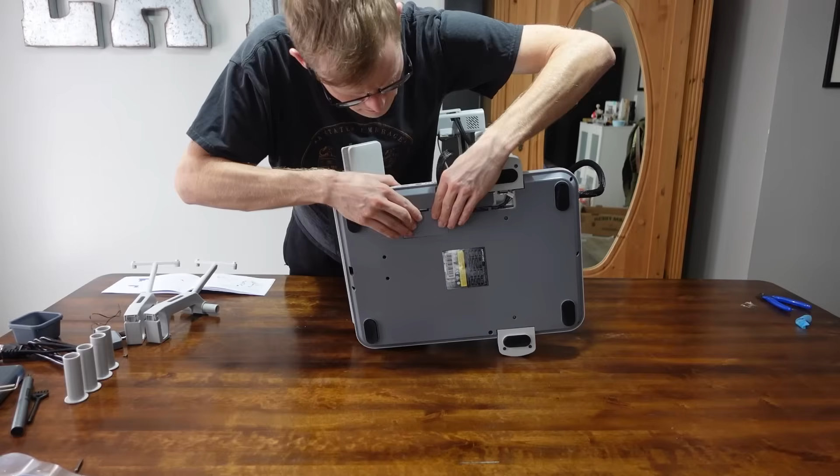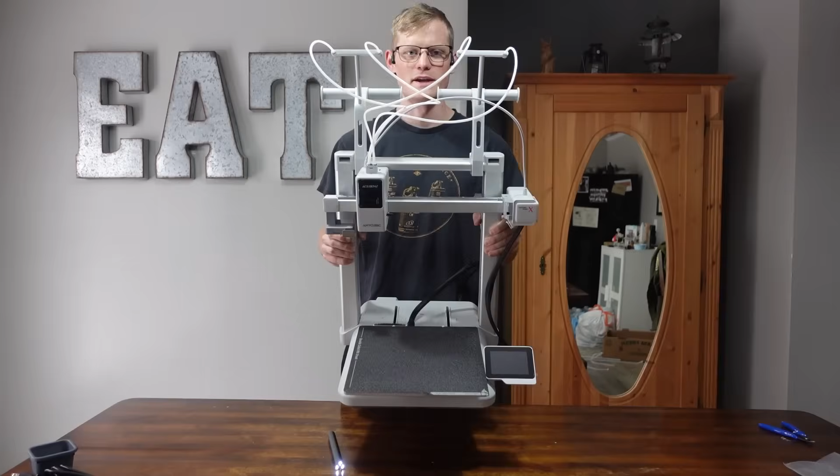Alright, so the Anycubic Kobra X is now done being assembled. It only took a few more minutes to assemble than a regular Core XY, but that's because the gantry and the bed are separate. Then again, it was only 8 bolts and just took a few extra steps. The assembly and setup was super quick.

The fact that this will hold 4 filament spools and the management system is contained right here is really nice. I am very excited to test this machine out, so I'm going to take it over to the print room and start some prints.

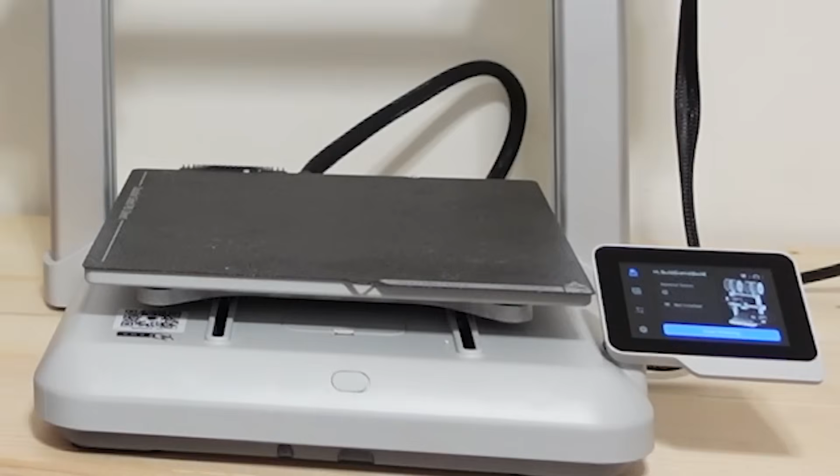Alright, first things first, I'm the realist. Second things second, printer specs. So, the first thing you will notice about this printer is that yes, it is a bed slinger, but it does have some pretty cool features. To start with, the build volume on this printer is actually larger than most Core XY printers on the market, which are only 256 millimeters cubed. This is 260 millimeters cubed. The Kobra X does not have a separate filament system, it is actually all located within the extruder itself.

But this printer isn't just multicolor, it can also do multi-material printing. So you can print PLA, TPU, PETG, PVA, and many more. Basically anything that this printer can print, it will print in a multi-material fashion.

This printer also comes with the new ACE Gen 2 extruder mechanism, which allows for variable pressure to be applied to different filaments based on their hardness. So it can compensate for the different hardnesses in materials such as PLA or TPU when you're printing them together in a multi-material print. The printer itself also has a 49-point auto-leveling system that runs before every single print.

This ensures that each print is perfect every single time. Another great thing, they have redesigned this hot end to make swapping out the nozzle so much easier. You simply just pop the lever open and the nozzle can be taken out and swapped. The printer can resume printing after power outages, and you can skip parts if there's defects detected during printing.

Also, this machine retails for $399. However, with the early bird special, this only costs $279, which is insane for everything I just said. It also has a built-in camera for print monitoring, spaghetti detection, and time lapses.

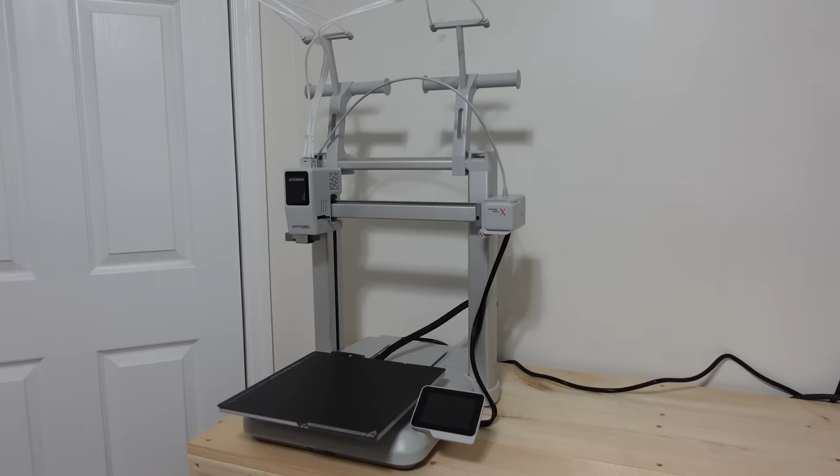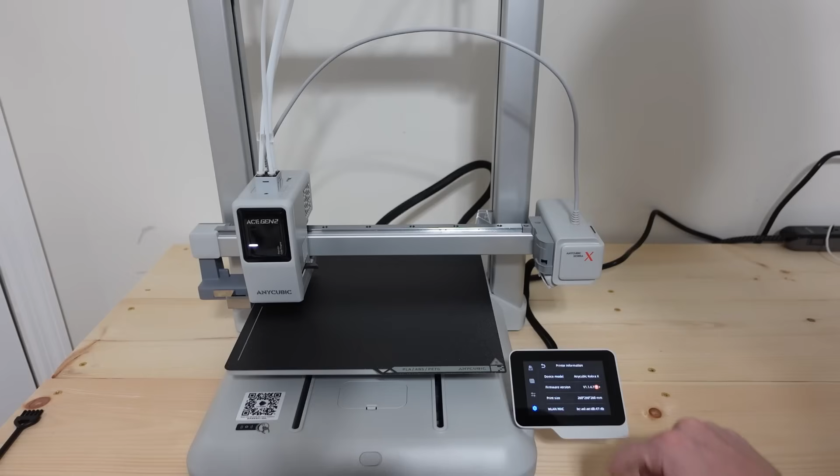After powering on the printer for the first time, I ran through the basic startup process. I set the language, connected it to Wi-Fi, and scanned the QR code, which linked the printer to my Anycubic account through the app on my phone. It then ran through the full calibration process, which took about 15 to 20 minutes. After that was completed, I then downloaded and installed the latest firmware on the printer.

The filament is placed onto the spool holders above and then pushed into the PTFE tubes until you hear the beep, which lets you know that the printer has identified the filament. If you are using Anycubic branded filament, there is an RFID reader on the front left of the machine that will detect and automatically add the filament settings to the next filament that is loaded. However, if you're using generic filament, you can manually enter the filament details right on the printer screen.

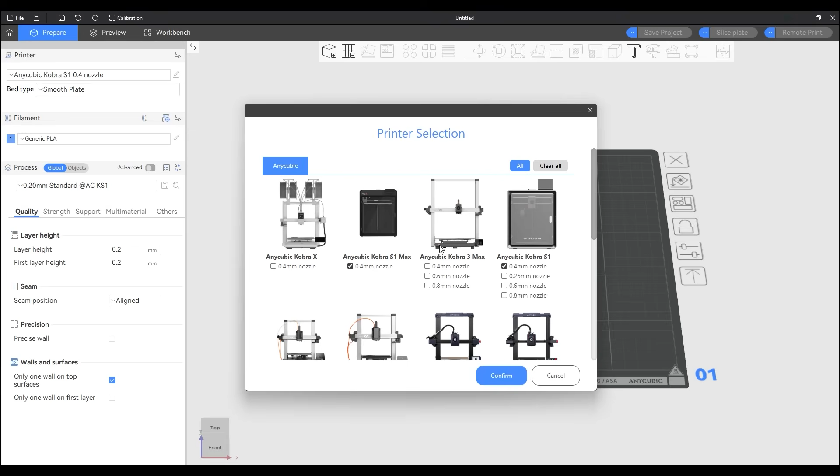The Anycubic Slicer, Anycubic Slicer Next, can be downloaded directly from the website. Once downloaded and installed, you simply add your printer. Since I already bound mine to my account, it showed up automatically after signing in once I selected the printer.

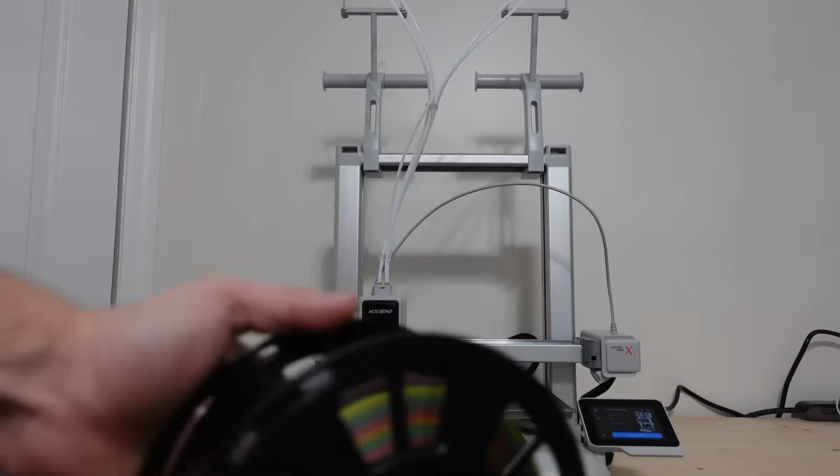For the first print, I found this large flexible scorpion model over on Anycubic's Maker Online. The filament I'm using is this super old color changing filament that's like ancient. It literally snaps whenever I bend it. So I'm going to try it.

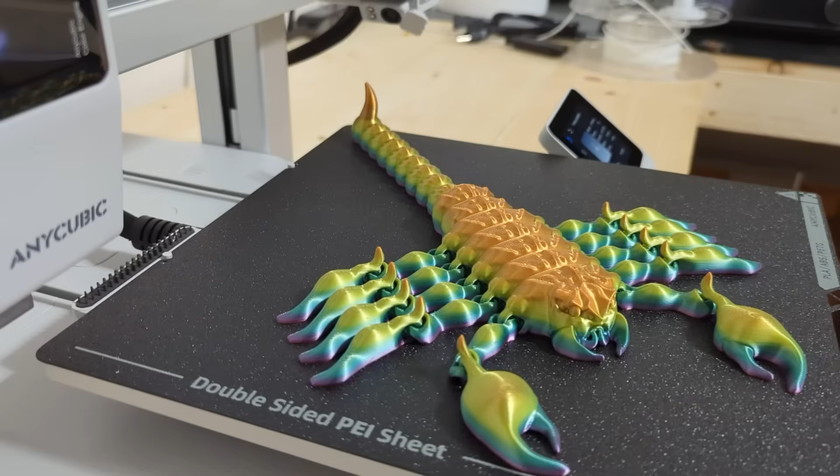I dropped it into the slicer, used the stock settings, sliced it, and then sent it to the printer. After just over 4 hours of printing, it finished. 82 grams of filament, and honestly, phenomenal.

It adhered really well to the PEI build plate. It popped off the build plate really easily, and the plate side looked very uniform. The print had no warping or layer line shifting.

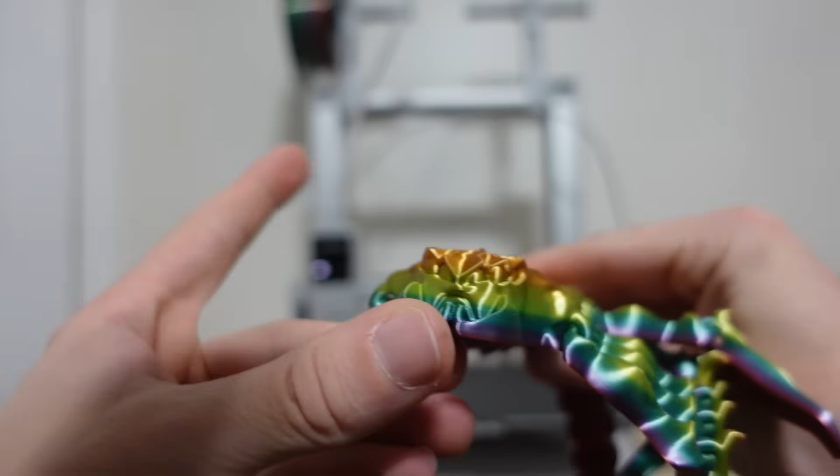The print itself was extremely nice. All of the joints flexed properly, and the layer lines were super clean. Great first print straight out of the box.

Next, I wanted to test the multicolor printing aspect of this printer. I found this octopus over on MakerWorld, and it was perfect because it switches color constantly due to the tiny dots scattered around the model.

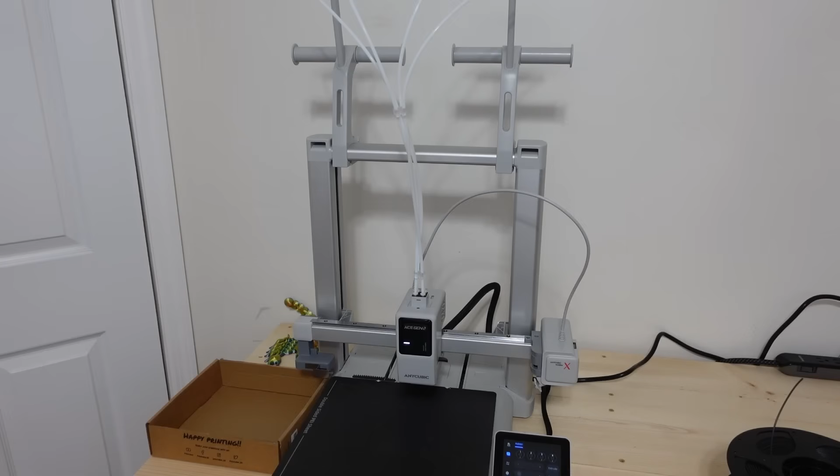Over on the printer, I loaded in blue, light blue, white, and black PLA. I dropped the file into the slicer, assigned the correct colors, sliced it, and then sent it over to the printer.

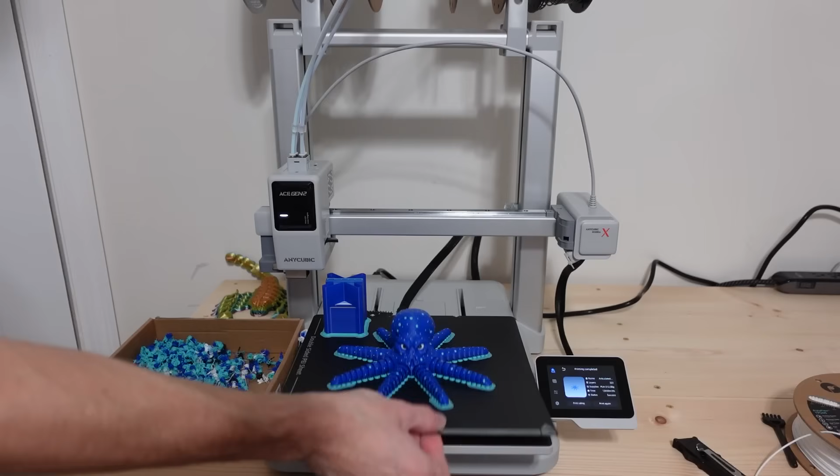After 14 hours, it used 217 grams of filament total. It had great bed adhesion.

I was actually able to pop the torso of the octopus up, and the tentacles held the build plate, which an octopus would do. Once I popped the octopus off, you can see that it had extremely clean layer lines.

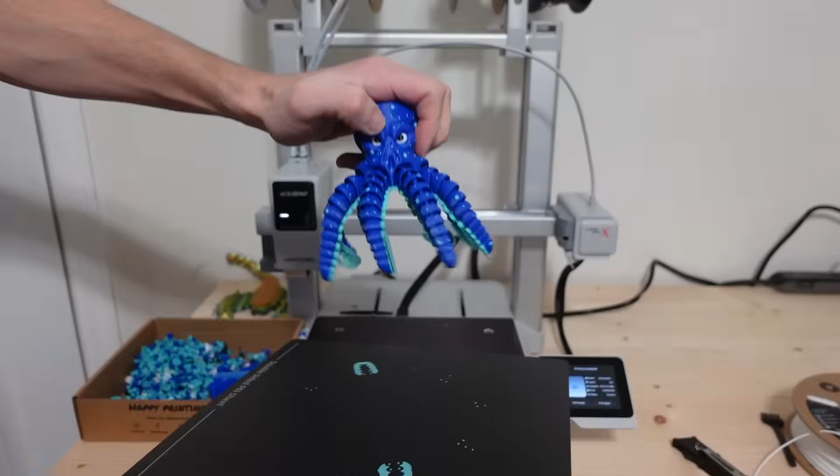There was no color bleeding or color distortion where it switched colors. The flexibility was consistent throughout the entire print, and everything was very uniform.

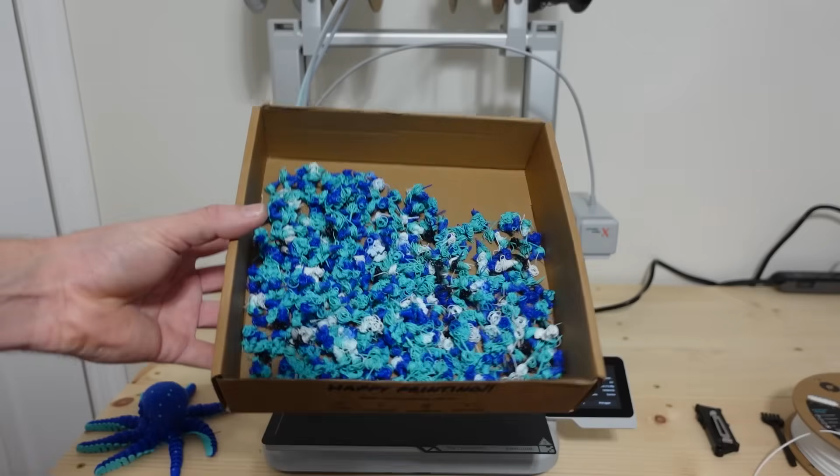The printer flushed more filament in waste than it used for the octopus. 99.5 grams of filament was flushed, 33 grams were used in the purge tower, and then 85 grams were used for the print itself. But it is drastically less filament waste than most printers.

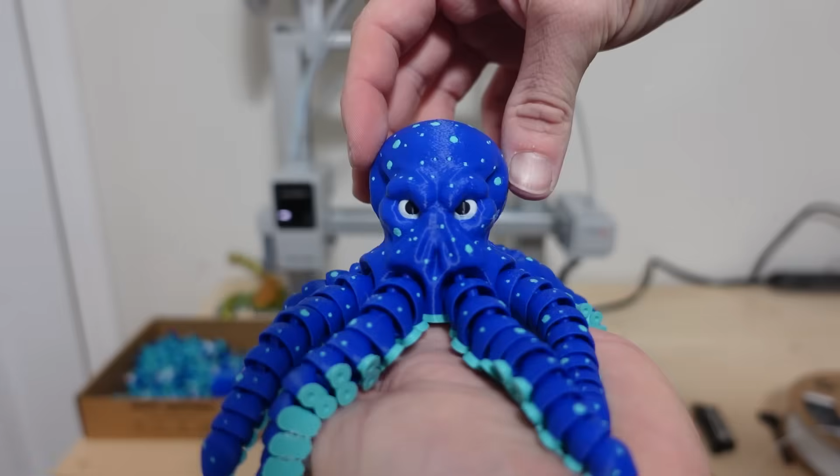All in all, the print came out gorgeous.

The poop chute. I found a filament poop collector in the local files and printed this in red PLA. I also used filament that I knew would run out before the print finished to test the filament runout sensor and also see the filament resume functionality.

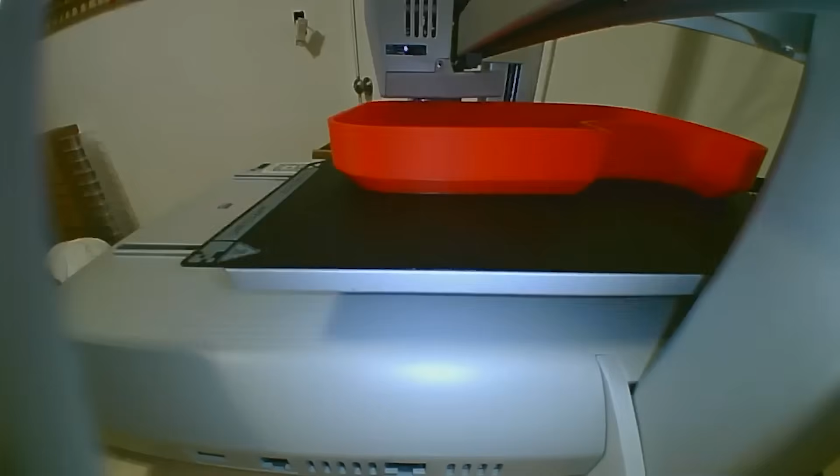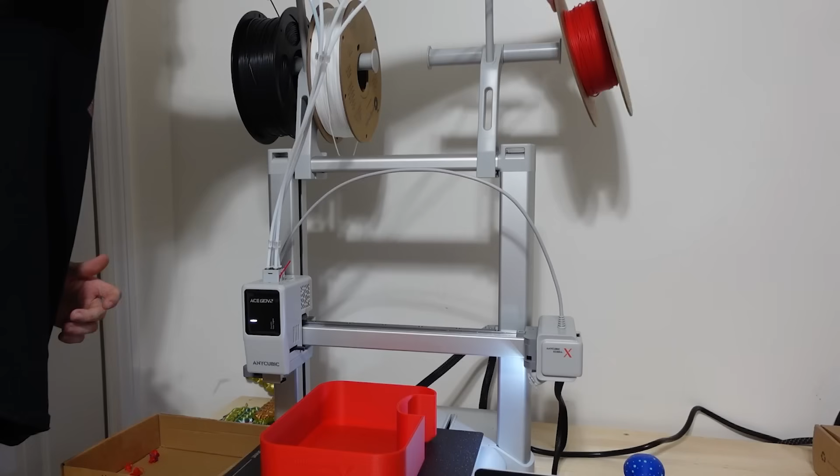With about an hour left, the filament ran out. The printer actually pushes the remaining filament out of the side of the 4-channel PTFE housing when it detects runout. I loaded in the new filament, hit resume, and it continued without any issues.

Once it was finished, you can see that it printed very nice. The bottom and top surfaces looked fantastic.

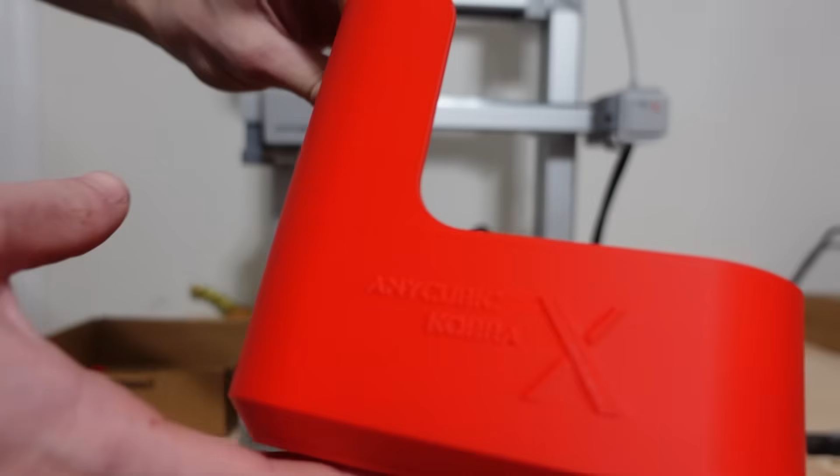There is a slight layer line where it resumed printing once I added the new filament, but I think that's because I did let it sit for a few hours before I resumed the printing. All in all, the print came out great and I love the way it looks.

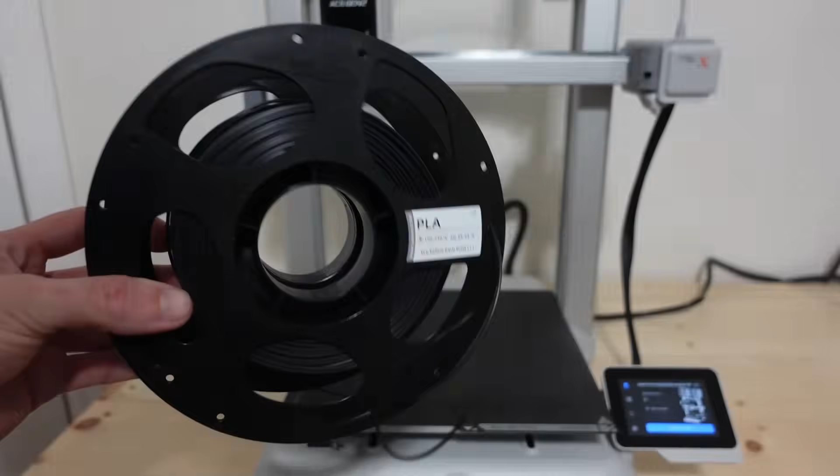PLA is hard, TPU is soft. Combining them can be somewhat tricky. I used Anycubic black PLA and Polymaker white TPU 95A. I put the spools onto the spool holder and then loaded them into the printer.

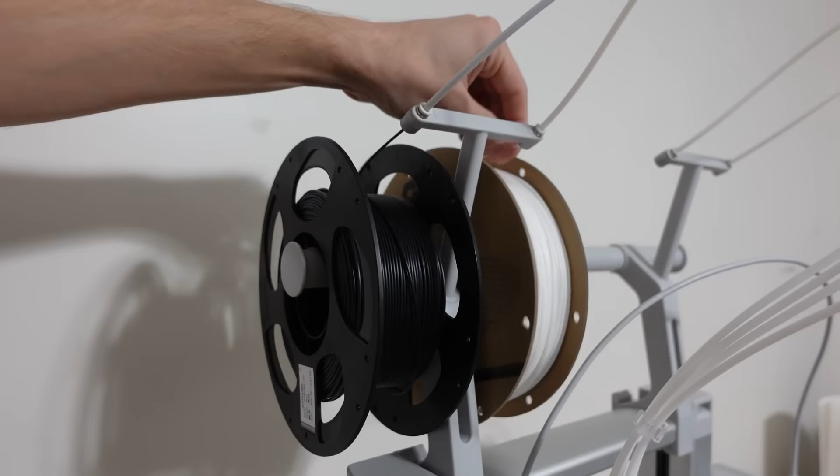I want to point out that if the TPU is too soft, it can be a little tricky to push the filament through the PTFE tube and down into the filament sensor. I found that if you pop the PTFE tube off and then push the filament down, it detects it just fine and has no issues.

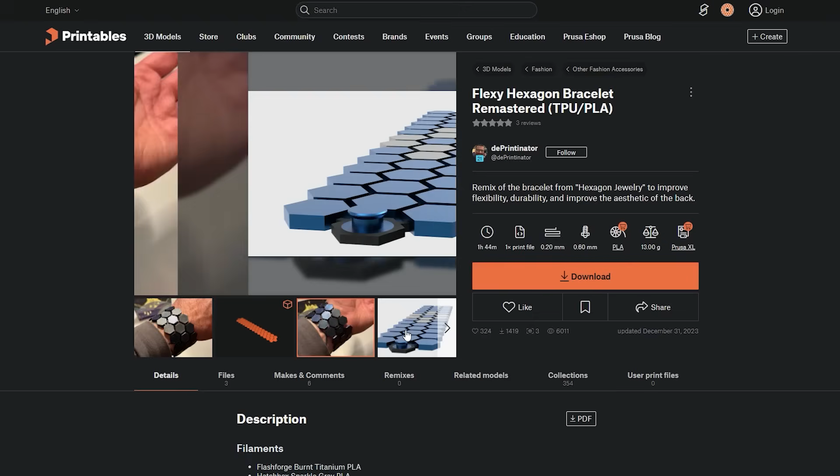Once the filament was loaded, I found this hexagonal bracelet over on Printables. I painted the hexagons to be PLA and then the connecting links as TPU. I left all the stock settings, sliced it, and then sent it to the printer to be printed.

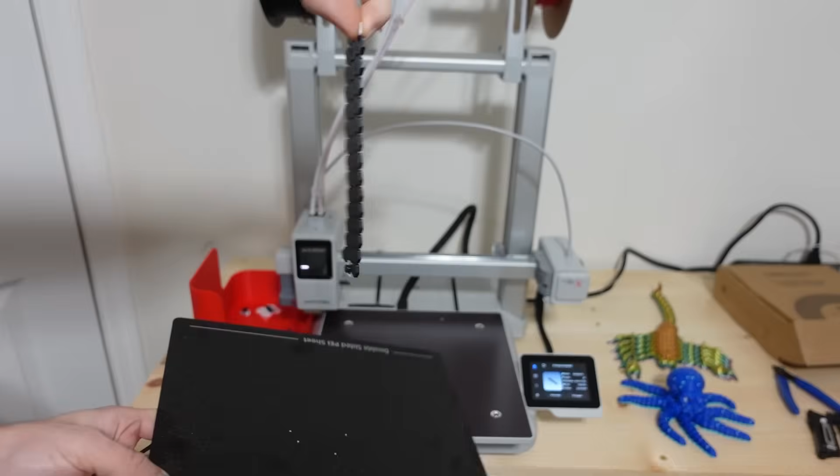And in under an hour, the print was done. There was barely any stringing and it had great layer adhesion between the materials. The PLA and TPU actually stick really well to each other and it's extremely flexible.

The TPU loop actually snaps perfectly around the PLA nub and it looks really nice. The print itself was super clean and it was a great hybrid TPU PLA print for my first try.

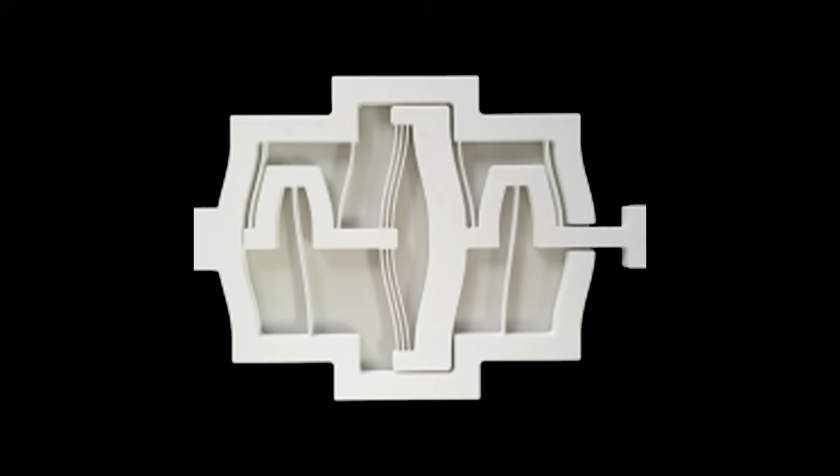The bracelet was cool, but compliant mechanisms are cooler. I found these pliers over on Printables that use PLA and TPU together in one print. I dropped the files in the slicer, assigned the joint as TPU, and left everything else as PLA. I changed absolutely no settings, sliced it, and sent it to the printer. After about 3.5 hours, it finished.

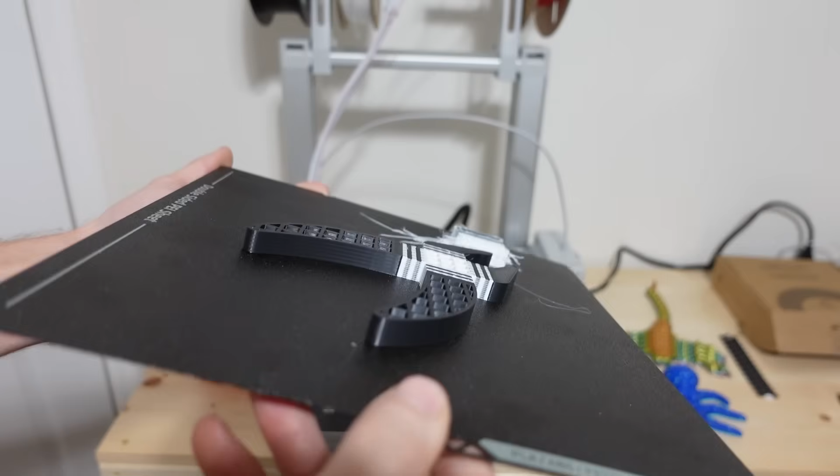There was some moderate stringing, but nothing serious. The PLA popped off the build plate, but the TPU sticks pretty well. However, once I got it off, I snipped off all the stringing and it looked great. They move, flex, and function properly.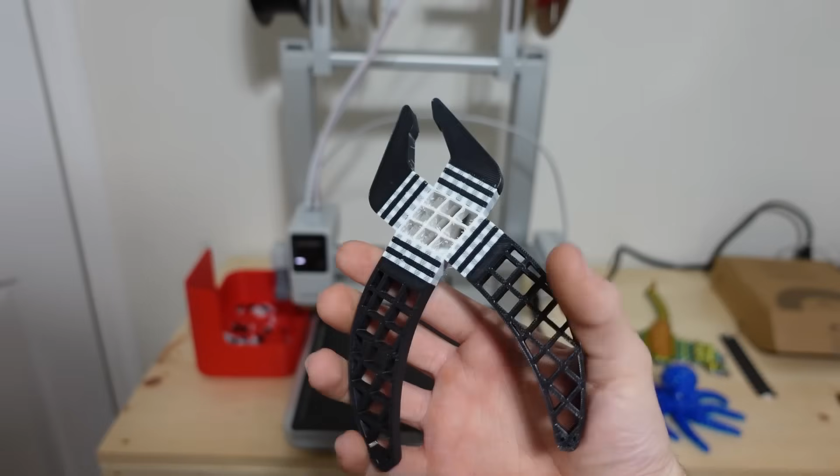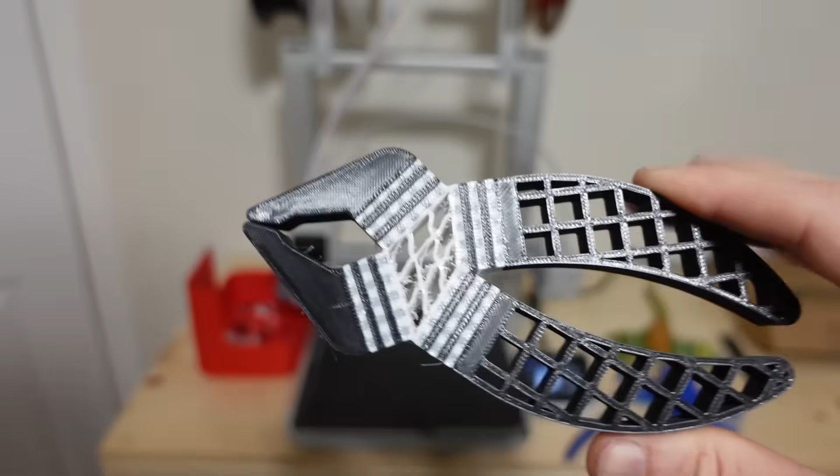Could I have dialed in the retraction settings and messed with it a little bit? Sure, but even without tuning it, it still looked fantastic. The pliers can actually be used to pick stuff up and move stuff around, but all in all, this is just a great way to show you how multi-material prints work and function.

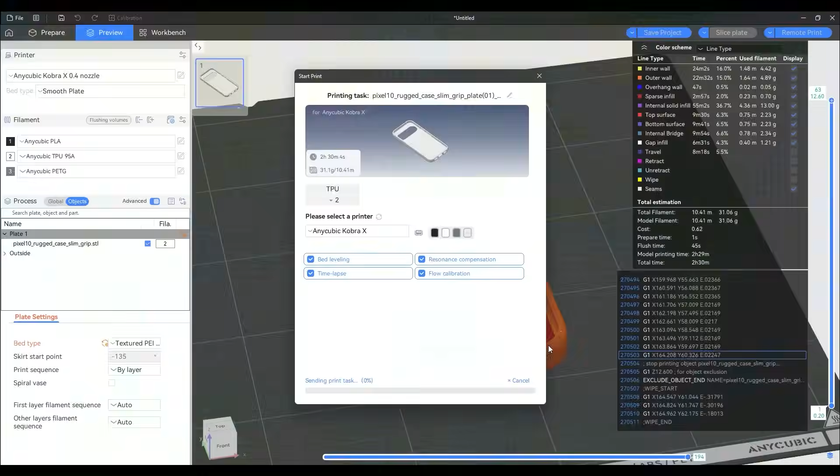With all the other prints out of the way, I wanted to test just straight TPU. I found a phone case for a Pixel 10 Pro on Printables and dropped it into the slicer. I didn't change any settings and printed it without supports, even though there are overhangs on the phone case itself. After 2.5 hours, it finished, and it came out pretty decent.

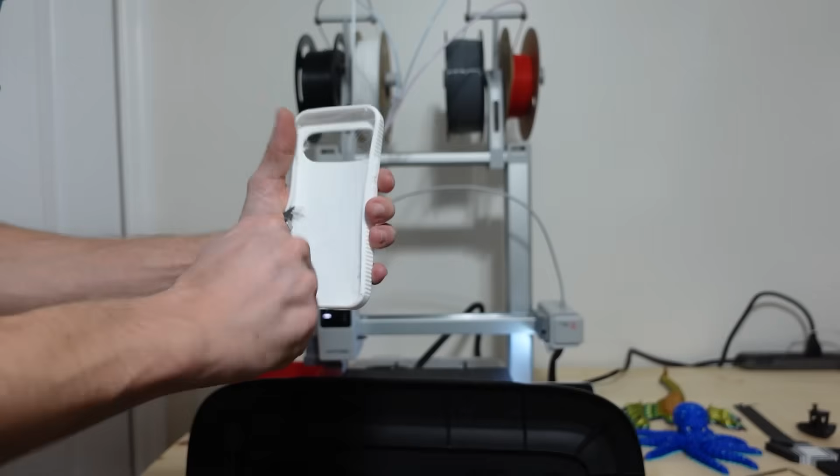The main issue: TPU sticks extremely well to PEI build plates. I actually pulled so hard removing it that I slightly tore a section on the back. There was some minor stringing on the part, but I was able to snip all of those off super easily. It fit great onto the phone and holds really well.

There were a few layer inconsistencies, but all the buttons functioned, and overall it felt really solid. This was a great test for just TPU.

Alrighty, ladies and gentlemen, it's time for my thoughts on this printer. And I can honestly say I'm pretty impressed with it. At just $279 with the early bird special, the amount of stuff you're getting with this printer is insane for the price. It is just mind-blowing that these printers are now less than $300.

The multicolor printing worked great, the multi-material printing worked great, even though I had some slight issues with stringing on the TPU, but I was using some pretty flexible TPU. Overall, the print quality and consistency has been fantastic. I do like the fact that there's no separate filament system and everything is contained on the printer itself.

She has been a pleasure to work with, okay?

So I do recommend this printer if you're getting into 3D printing, wanting to get into the hobby, or if you're a parent that wants to get a 3D printer for their kid. So if you are considering getting another printer, or getting into this hobby, I highly recommend this machine as your first printer. It's cheap, it's easy, it's consistent, and it produces great quality prints every single time.

The only space it takes up is vertical, which is nice instead of having to have a separate unit next to it that takes up even more space. While I typically don't print multicolor or multi-material, it's still great to have just in case I do want to use that.

And it clearly shows. Being able to print multi-material parts is really cool, and it's a step in the right direction. So with all of that being said, I want to say thank you to Anycubic for sending me this printer.